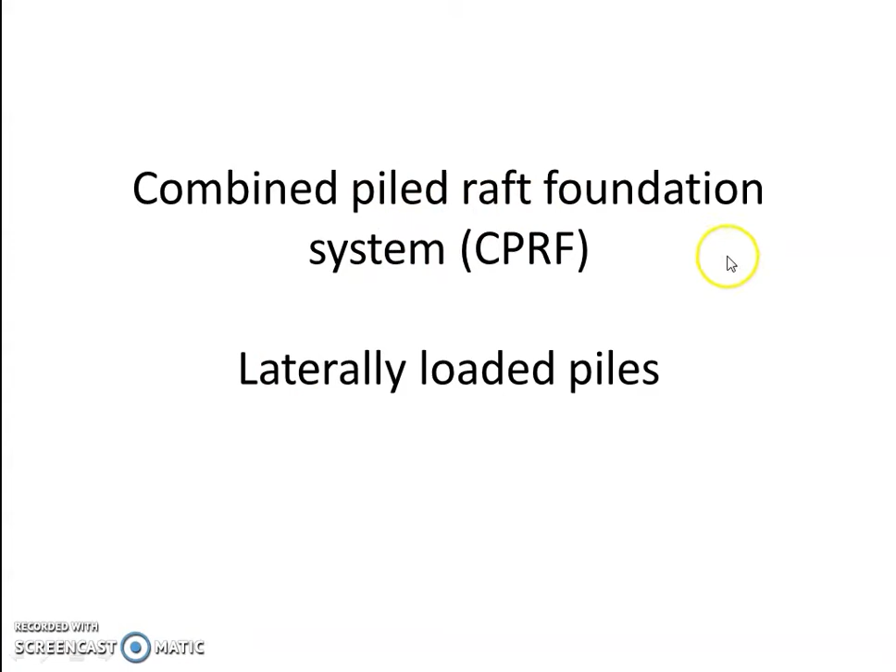Hi, today we will learn about combined pile-raft foundation, which is called CPRF, and also laterally loaded piles.

In CPRF, the load from the superstructure, which is the applied load, is transferred through a load sharing mechanism due to the interaction between the piles, soil, and raft. All together help in taking care of the load coming from the superstructure.

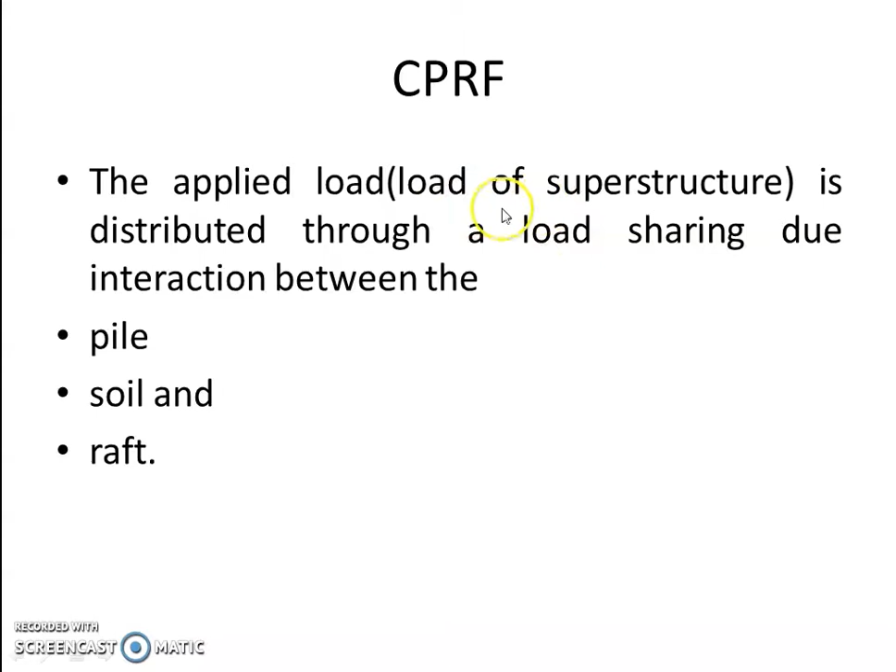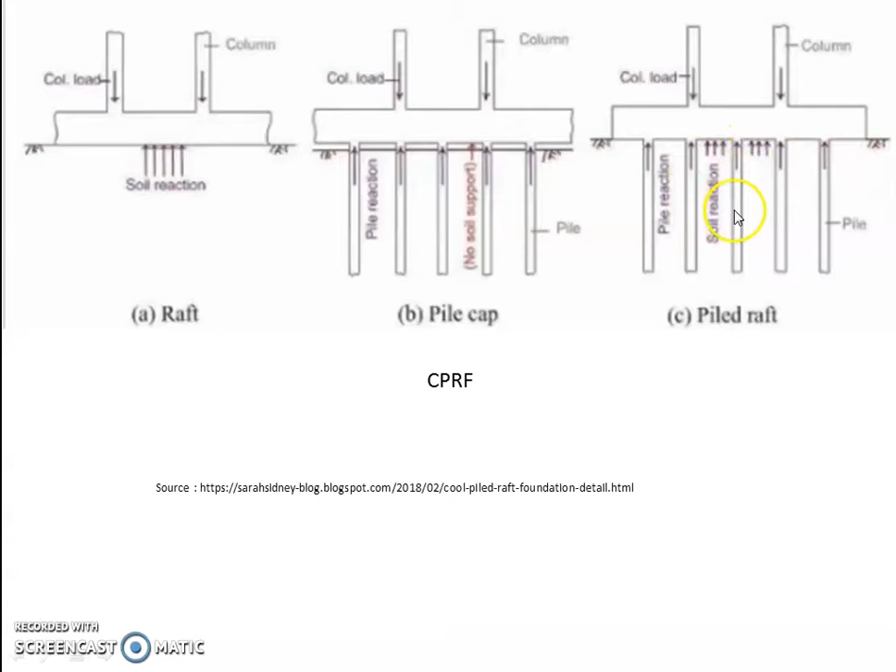But now in the third figure, called pile raft foundation, we can see that the raft is resting on the soil. There is no gap between the raft and the soil layer. So here the applied load is taken care of by the reaction offered by the number of piles situated here, and also by the reaction offered by the soil.

So CPRF is the combination of raft and pile. The load coming from the superstructure will be taken care of by the raft and also by the piles, and also by the reaction offered by the soil, because the raft is resting on the soil, so soil also will take care of the load.

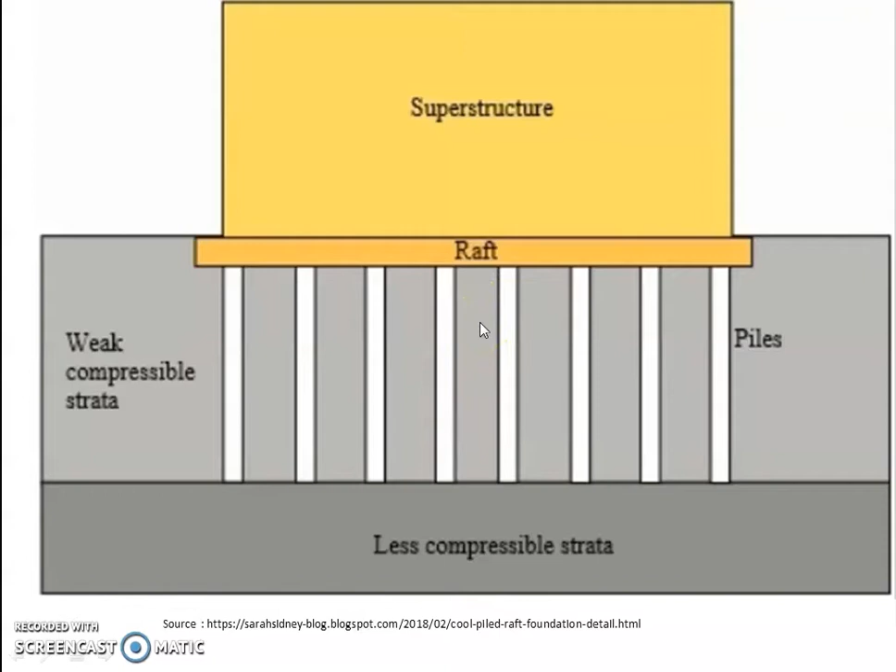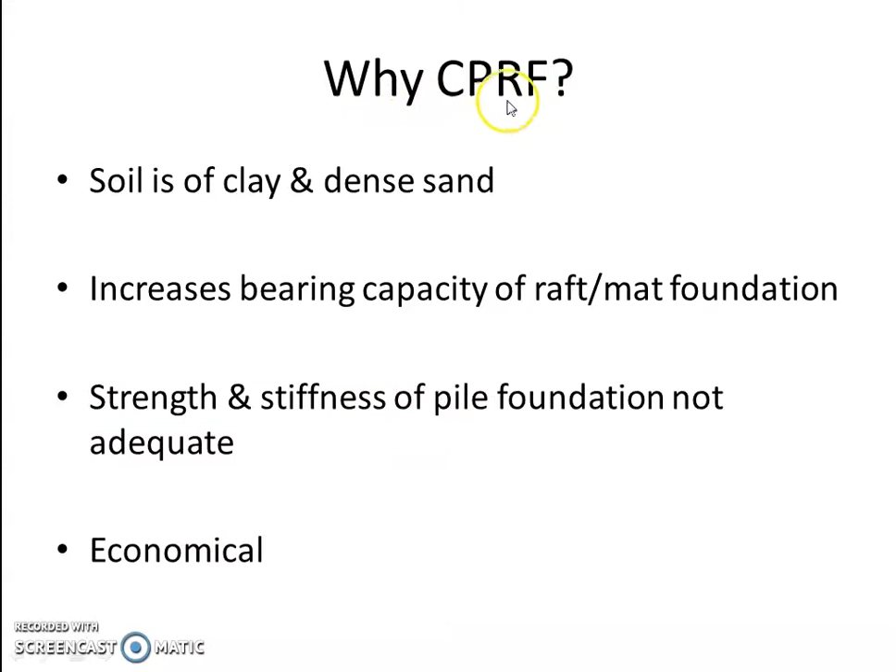Why is CPRF to be provided? It is usually considered when the soil is of clay and dense sand, and CPRF increases the bearing capacity of raft and mat foundation, and also the strength and stiffness of the pile foundation. If it is not adequate, we will have to go for CPRF, and CPRF is considered to be an economical solution.

The example for piled raft foundation is the Burj Khalifa, which is supported over a large reinforced concrete raft, and this raft is also supported by bored reinforced concrete piles which we can see here. So on top there is raft, and at bottom there are a number of piles. The raft on top is of thickness 3.7 meter, and there are 192 piles provided, whose diameter is 1.5 meter, and the total length of the piles ranges up to 48 meter.

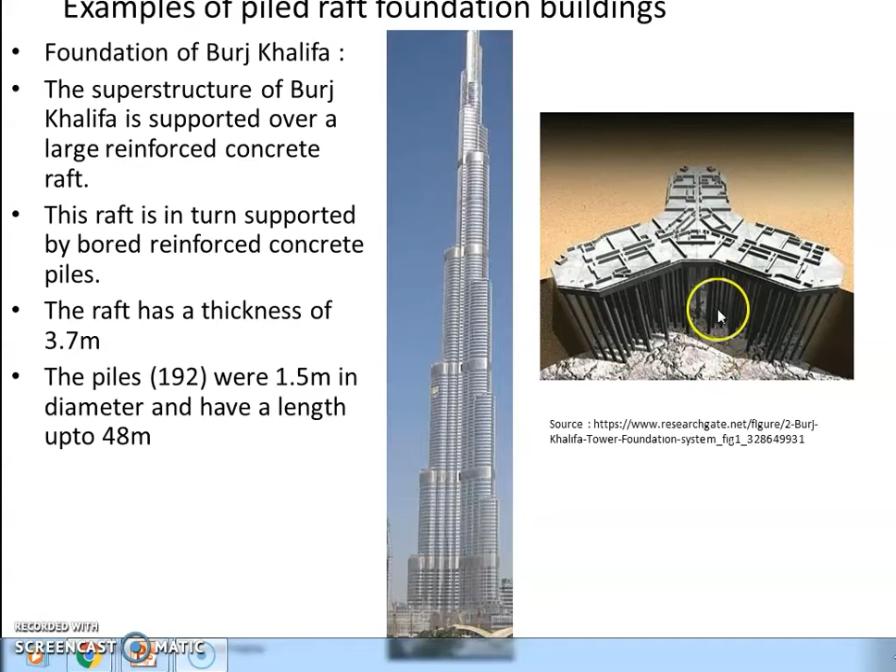Next is laterally loaded piles. These piles experience lateral deformations due to the horizontal loading which would act on them. This loading would be due to earthquakes, wind, vehicle forces, wave impact, ship impact, and also lateral earth pressure.

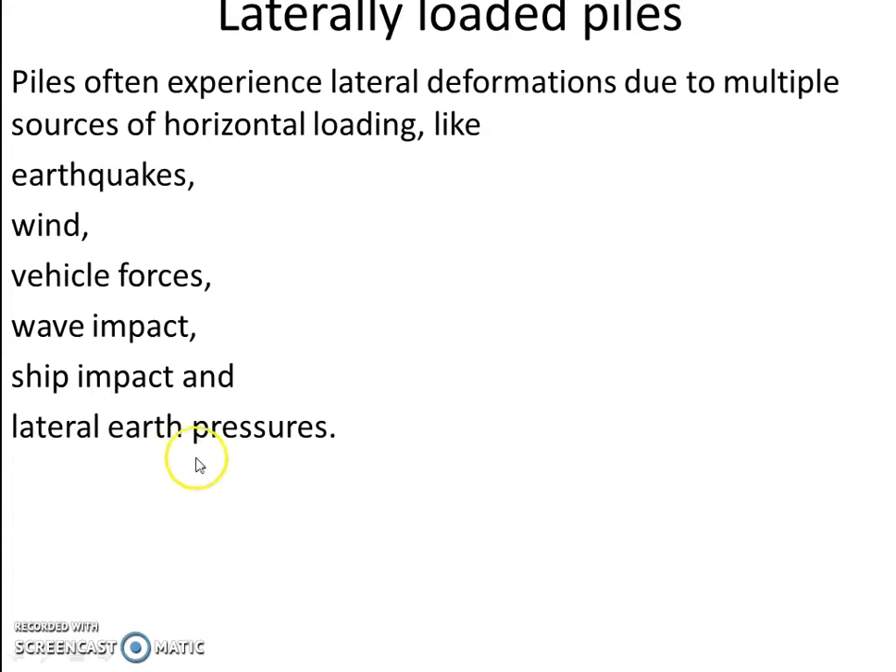Reese and Matlock approach: as per the conventional approach of pile foundation design, it was assumed that vertical piles cannot resist lateral loads. That means it was only assumed that vertical piles will only be able to take care of loads acting in the vertical direction, and it was assumed that they won't be in a position to take care of horizontal loads, that is lateral loads.

But later on, some methods were developed which explained that the lateral loading of vertical piles can be found out by using the plastic theory and the elastic theory.

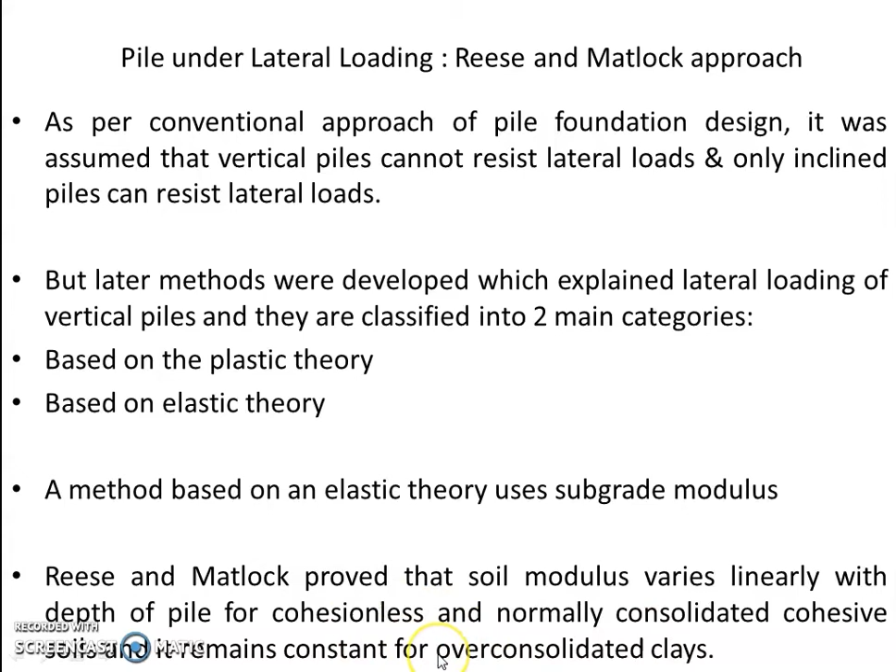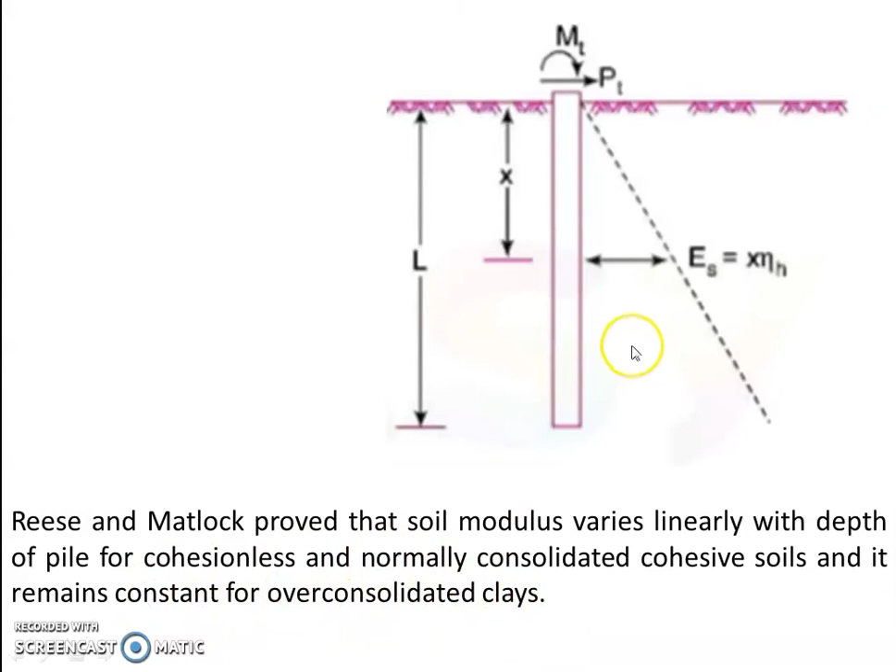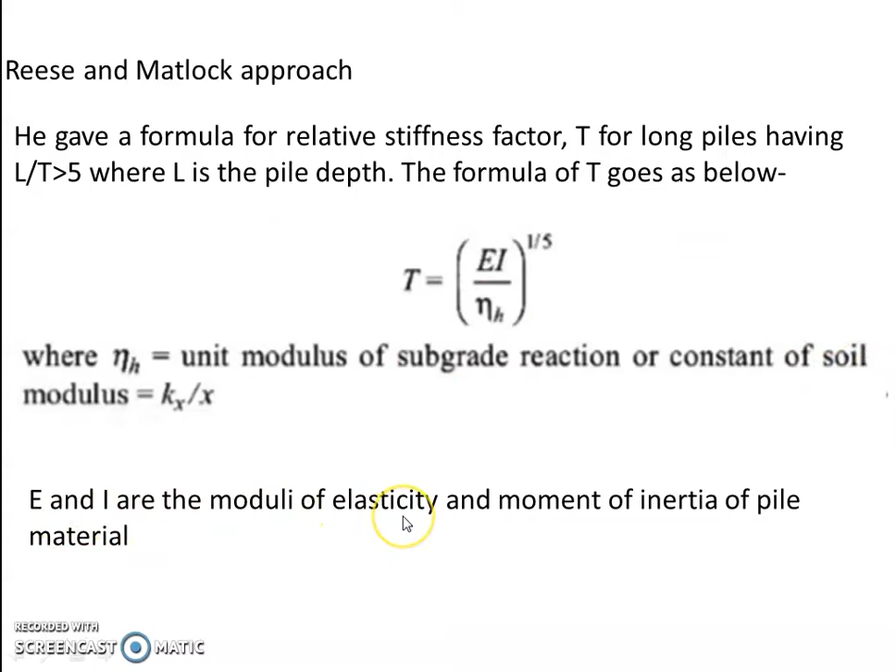A formula was given for finding out relative stiffness factor, that is T, for long piles where L by T is greater than 5. T can be calculated using formula EI divided by eta H, where eta H is the unit modulus of subgrade reaction, and E and I are the modulus of elasticity and moment of inertia of pile material.

When a vertical pile of length L is subjected to lateral load V, as seen in the figure, and moment M at the ground level, the deflection of the pile can be given as Y equals YA plus YB, where YA is the deflection due to the shear force or horizontal load V, whereas YB is the deflection due to moment M. So the total deflection Y will be equal to YA plus YB.

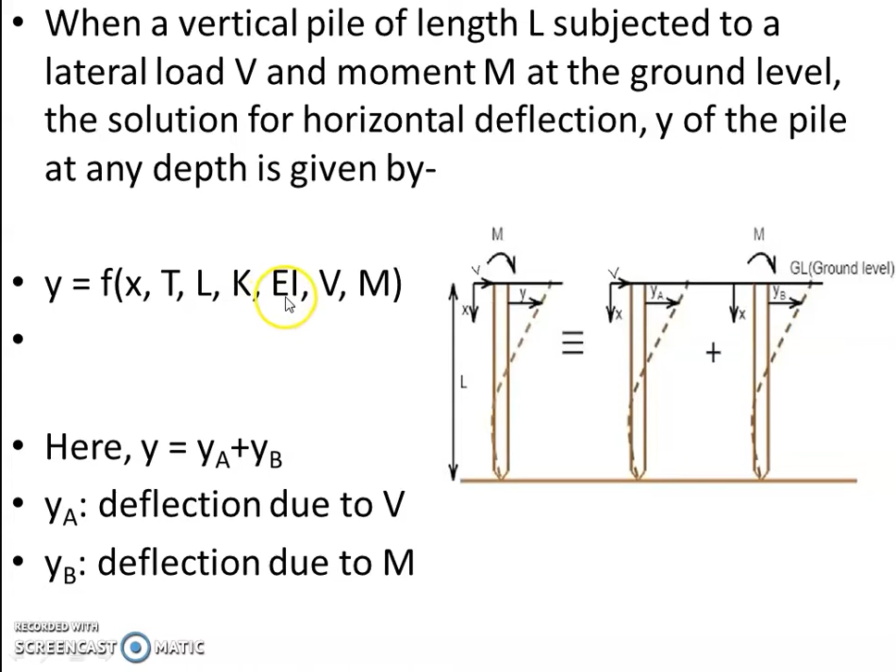Here Y is a function of X, that is depth, T, L, K, EI, V and M. The depth coefficient is given by Z equals X by T. Maximum depth coefficient is Z max equals L by T, because X is the depth under consideration, whereas L represents the total length of the pile. So maximum depth coefficient can be written as Z max equals L divided by T. Soil modulus function is equal to ES T raised to 4 divided by EI.

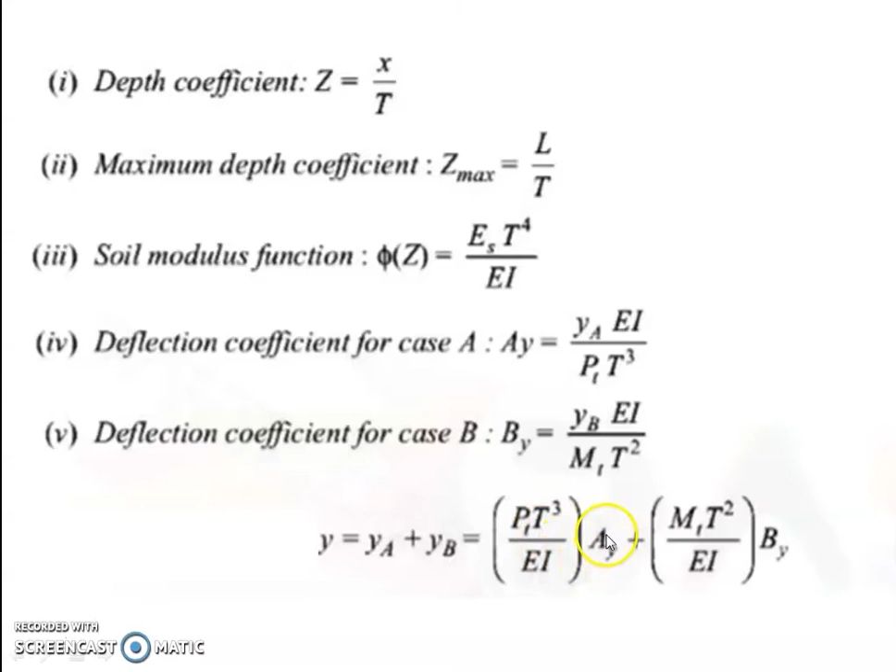Deflection coefficient for case A is given by YA into EI divided by PT cube, wherein the pile is subjected to horizontal load V, and deflection coefficient for case B, wherein the pile is subjected to moment, is given by BY equals YB into EI divided by MT square. So the equation for Y will be Y equals YA plus YB, which will be equal to PT cube divided by EI into AY plus MT square divided by EI into BY.

Now we'll solve a problem wherein we will find out how to get the values of maximum bending moment and deflection for a laterally loaded pile.

A concrete pile of 30 centimeters square cross section, with dimension 30 by 30, of length 5 meters, is subjected to a horizontal load of 5000 Newton. So V is equal to 5000 Newton and moment M is 4000 Newton meter at the ground level. Eta H is 20 Newton per centimeter cube. With this we will have to find the maximum bending moment and deflection, for two cases: the head of the pile considered free, and the head considered fixed with no external moment.

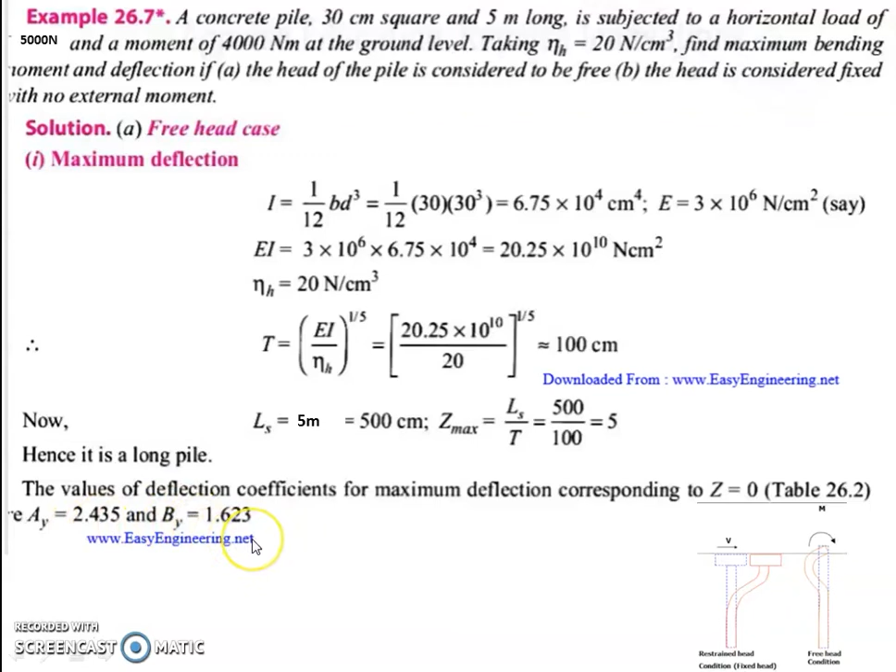Substitute AY value and BY value. EI was already calculated in the previous slide, so we get Y max equal to 0.092 centimeter.

Now we'll calculate the maximum bending moment, given by the equation AM times PT plus BM times MT. PT is calculated as 5 into 10 raised to 5, because P value is 5000 and T is 100.

Similarly, M is 4000 into 100, here in terms of Newton meter, but we have calculated it in terms of Newton centimeter. So M max will be equal to 10 raised to 5 into 5 AM plus 4 BM. That is what we get after substituting in this equation for M max.

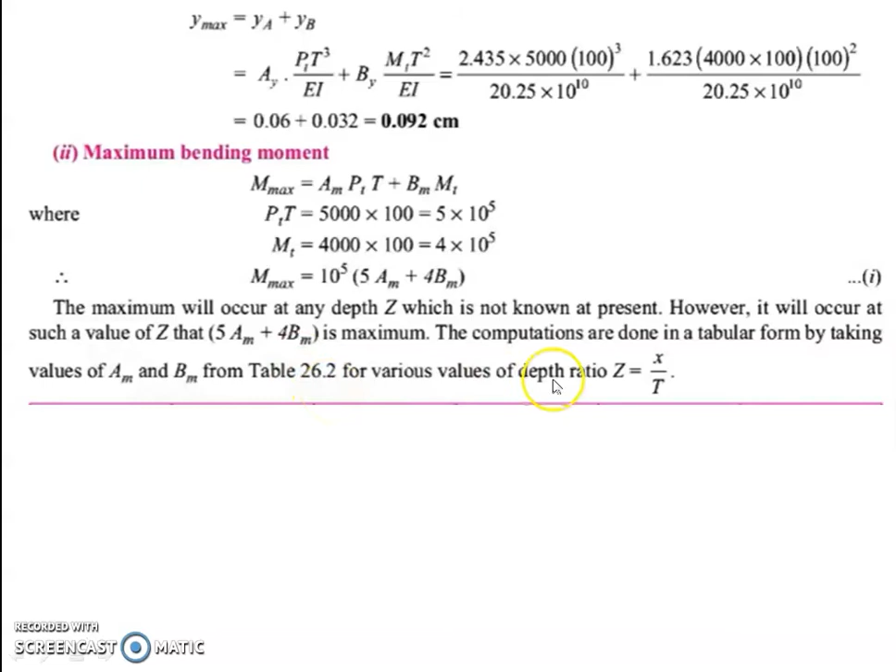The maximum bending moment will occur at some depth z which is not known at present, so we will have to find out at what depth z the bending moment will be maximum. It is known that the maximum bending moment occurs at such a value of z where 5AM plus 4BM is maximum. So we will have to find the values of AM and BM from the table for various values of depth ratio, that is x divided by T.

So Mx can be written as 10 raised to 5 into 5AM plus 4BM, and we finally get 7050 Newton meter.

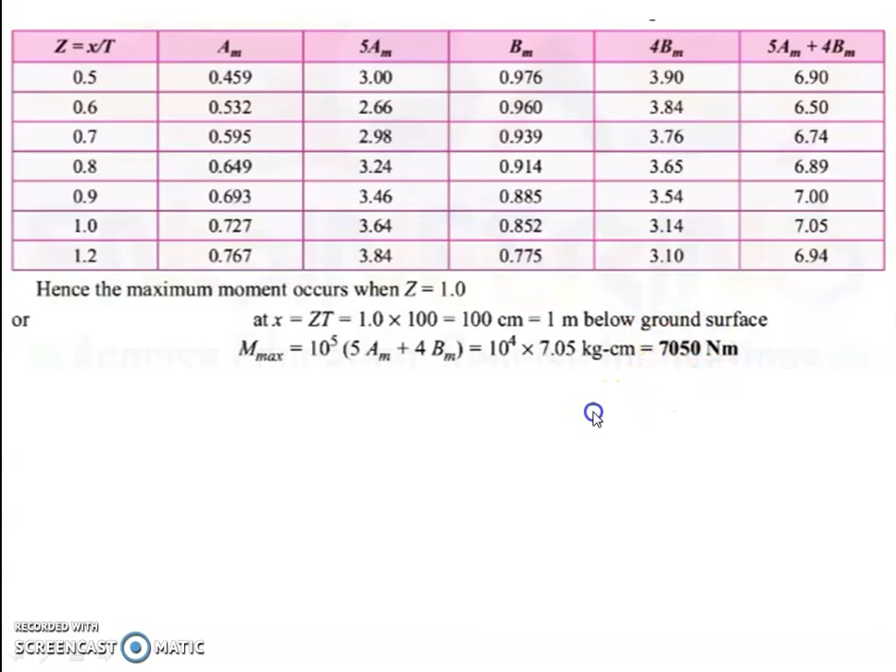Now the next condition is the fixed head case. In the previous one we considered the free head condition, wherein there was no restriction. But in the fixed head case the top of the pile is restricted, hence it is called the fixed head case. When there is fixity at the head, there will be no slope at the ground surface.

So at z equal to 0, s will be equal to sa plus sb, which will be equal to 0. So we can write as into PT square divided by EI plus bs into MT divided by EI equal to 0. Taking one term to the other side, since the whole equation equals 0, we get Ms equal to minus as divided by bs, into PT. Here EI and EI cancel out, and T cancels. So this equation gives the moment induced at the ground surface due to fixity.

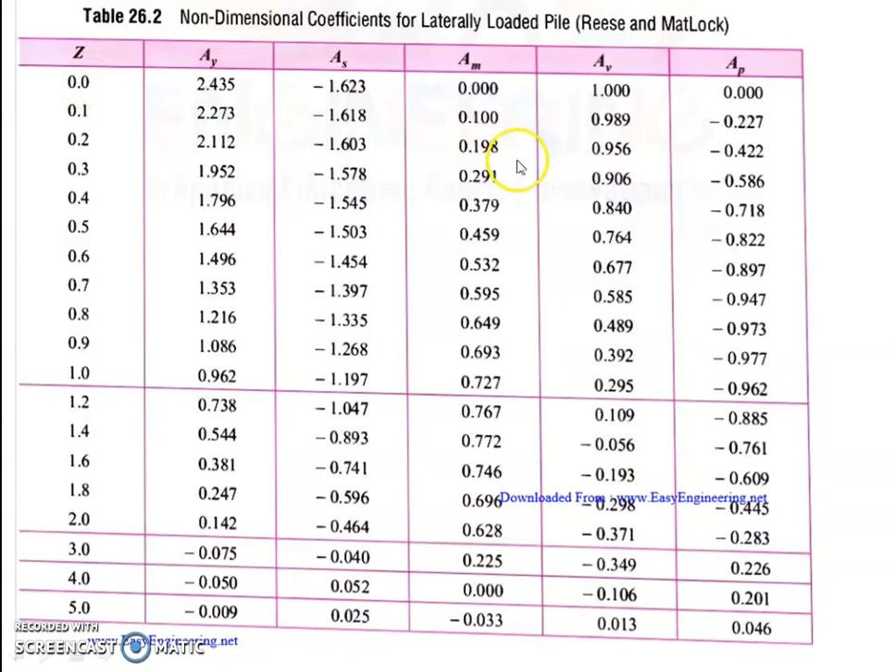From the table, for z equal to 0, we have the values of as and bs. Going back to table 26.2, we have as value equal to minus 1.623 for z equal to 0, and bs as minus 1.75 for z equal to 0.

Substitute the value of as minus 1.623 and bs minus 1.75, we get M as equal to minus 0.93 into PT. Here P is 5000 and T is 100 centimeter, so we get M as minus 4650 Newton centimeter.

And maximum deflection is given by equation y equal to ya plus yb, where ya is equal to ay into PT cube divided by EI, plus yb is by into MT square divided by EI.

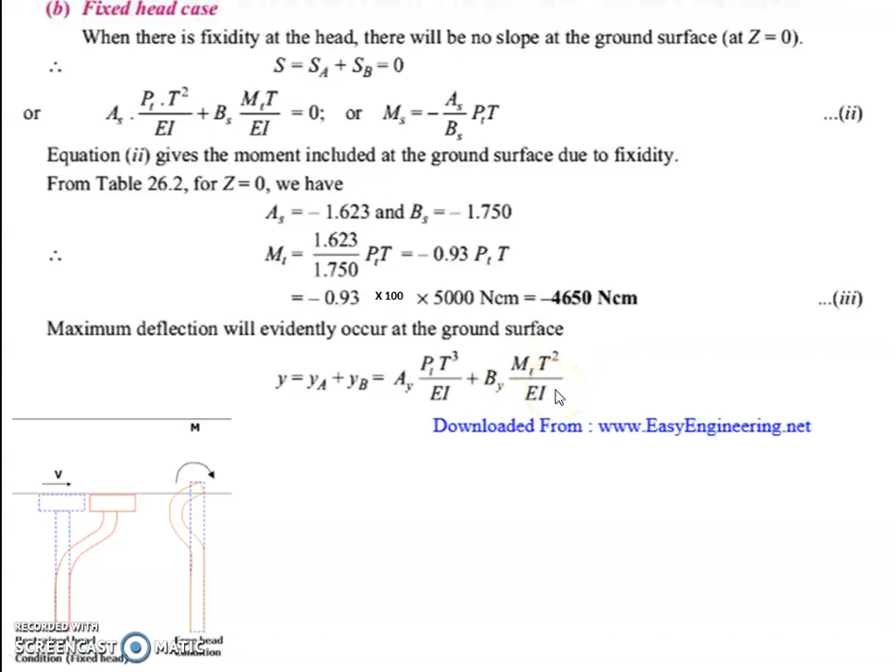Substituting the value of M, which is equal to minus 0.93 into PT, we get y equal to ay PT cube divided by EI minus by into 0.93 PT, so we get PT cube divided by EI, which is taken out as the common term, into ay minus 0.93 into by.

P is 5000, T is 100. So 5000 into 100 cube divided by EI was already calculated, which is 20.25 into 10 raised to 10, into ay minus 0.93 by. With further calculation we get Y as 0.0247 into ay minus 0.93 by.

At z equal to 0, from the table we get ay as 2.435 and by as 1.623. Substituting these AY and BY values, we get Y equal to 0.0247 into 2.435 minus 0.93 into 1.623, which equals 0.0228 centimeter.